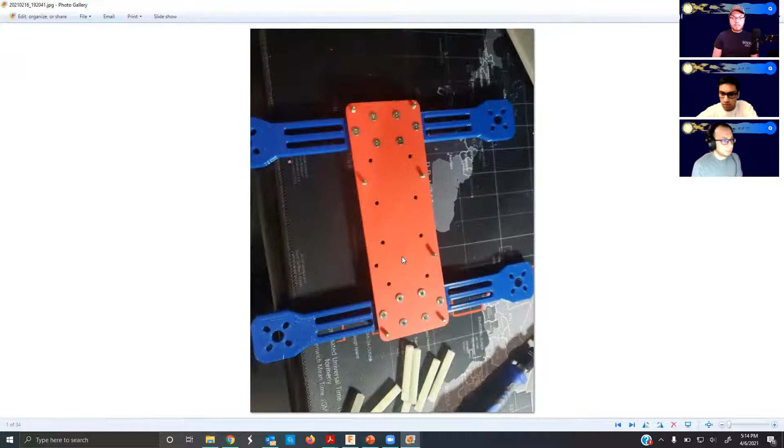Let me show some pictures of it. So this was actually 3D printed, and I think I shared this one in a previous presentation. You have the platform, then the arms, and then you attach the motors here, and of course you have the screws and nuts, the fasteners that hold everything together.

The idea behind this middle piece is to try to keep it sturdy enough so that it doesn't bend, since this is so long. And instead of making the whole thing super thick, just make the center line thick and hope that that should be good enough until we fly it and crash it, right?

And these are actually just store bought on Amazon, these spacers. So you can see these holes right here - these were actually designed with the spacing in mind.

Since I already knew I was going to use this flight controller, I went ahead and took the distance of these two holes and also put that onto this platform, so that way you could just screw it in.

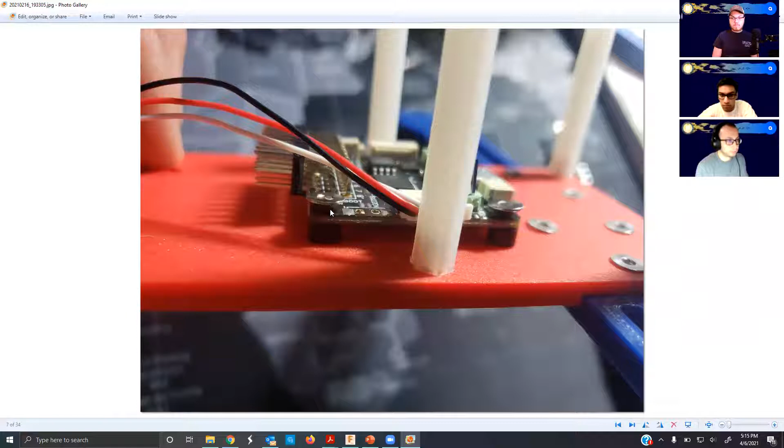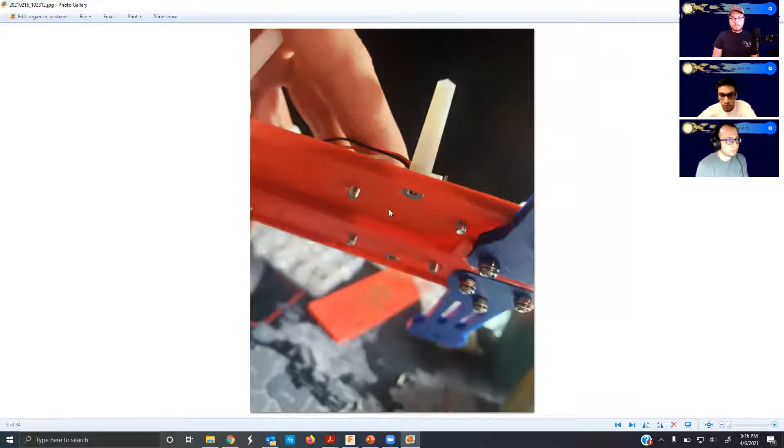So you can see it's got a couple small spacers, but the screws go right in. I guess it's kind of like you have to know which parts you're going to use in order to design it right. You can see the screws at the bottom right here that I was talking about.

And finally, once you add the nuts, the motors - the spacing on these I think is pretty common, so it should be good with just using a standard design with the hole pattern right here.

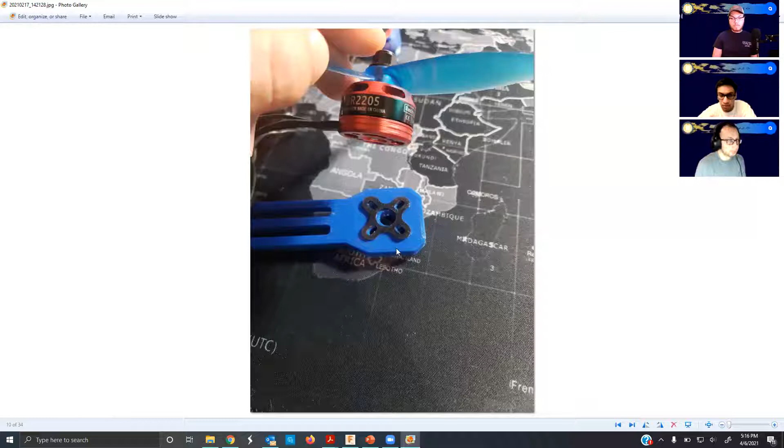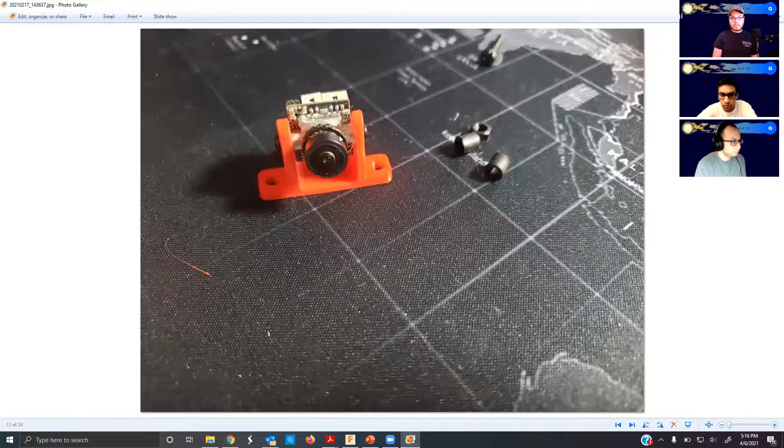And the camera, well, once again, it depends on what camera you're using. This bracket was also designed specifically for this camera. As you're gonna see, it bolts right here actually, and this is the top piece. I'll show the 3D model in a bit.

So that's how the camera looks on the top part, which is upside down. Then you have the electronic speed controller. Once again, measure the holes, and if you include that correctly in your design, then everything just bolts up pretty easily. These screws are pretty long, so they were pretty helpful.

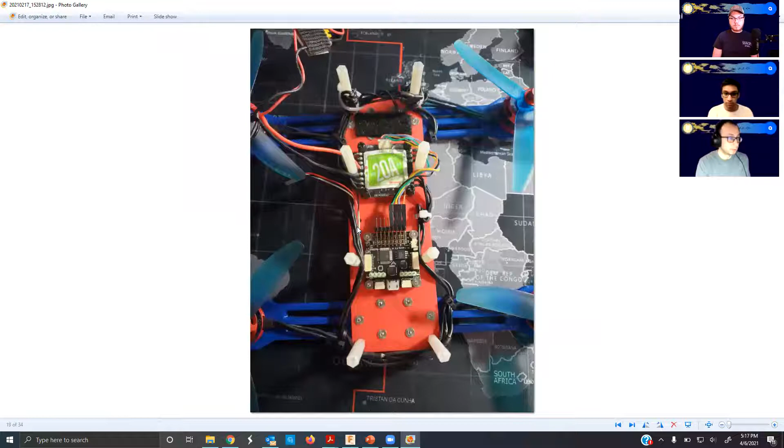And this is the bottom view of that. One of the things I used was Velcro, just because some things are so light, or they're not too critical, like they're not gonna fly off.

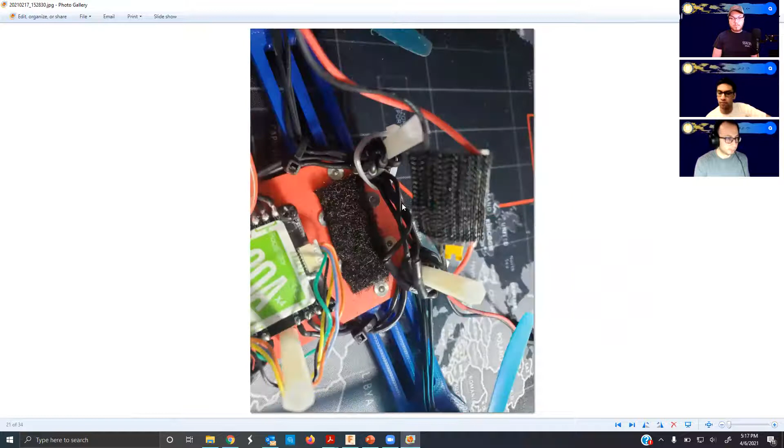Like Velcro is enough, so that's what I use here. I think I forgot what I put here - oh yeah, I think it was the battery eliminator circuit. That thing weighs just - it's really light, so the Velcro was enough to hold it in place.

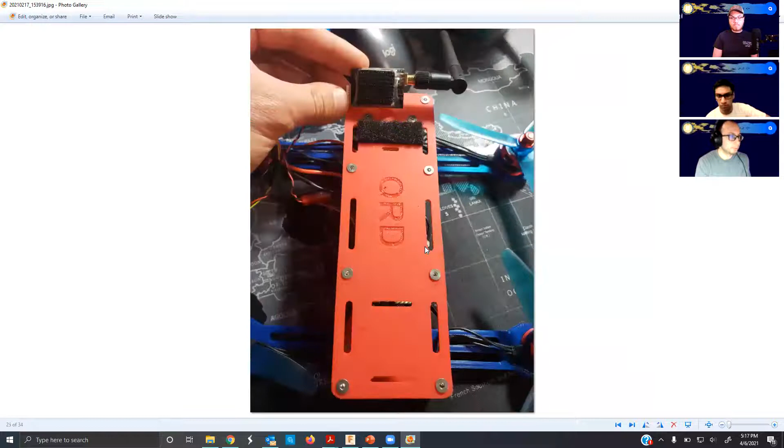And this is with the top piece on top of the drone. Once again, we have the Velcro - Velcro is our friend - and this is the video transmitter.

So you're gonna see with that one, I actually designed these holes right here, so that I could put a zip tie in addition to the Velcro, just because they kind of... pre-made, I guess we could make a custom bracket for it. But in my case, Velcro is a lot lighter than having an extra plastic piece to hold it, so I just went with the Velcro.

With drones, one of the things you're trying to reduce is weight, right? It reduces your ability to fly longer if you have a really heavy drone.

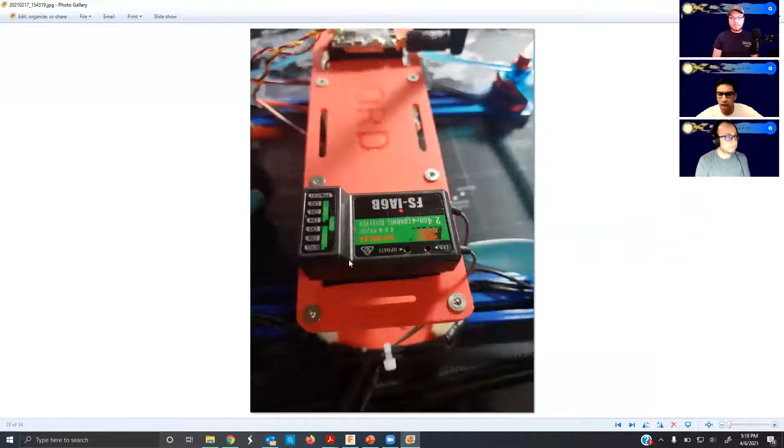I have a question. Yeah. So, at this point, I was wondering about the size of the holes for the zip ties - if they're long like that, wouldn't the zip tie go left and right? Couldn't it slip off?

Yeah, so it potentially could slip, let's say from here to here, but because it's pretty much enclosed within this gap and this gap, it's not gonna fly completely off the drone. So it might slide a bit to the left or right, but if you tighten it pretty well, even if it does slide a bit, it's not gonna fly off.

This piece, that's the important part, right? We don't want these pieces to fly off mid-flight. I would say you could even use two zip ties, one on each end of the hole, and that would probably secure it even better.

Oh yeah, so that's a very good point. Or actually building off of that idea, that was a good idea - maybe I could add an addition right here, maybe halfway or something, so that way it's two holes instead of one big one, or three small holes. True, but you also want to decrease weight, so I guess if that's good. Yeah, kind of trying to compromise.

So there's that zip tie, right? That we were just talking about.

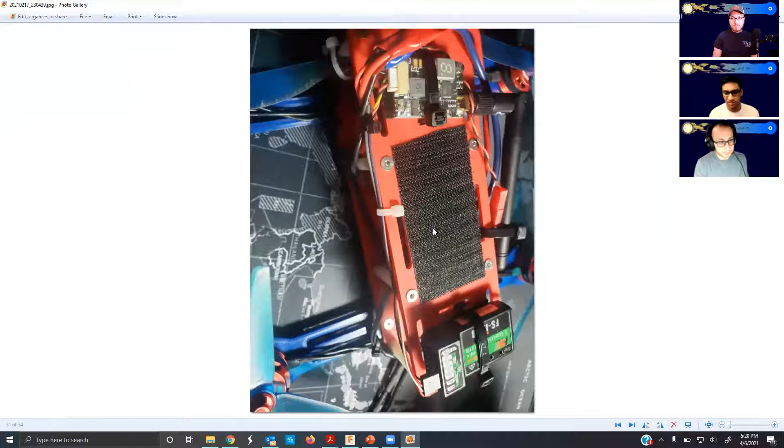And for the battery, I once again did the same with the Velcro - one piece on the drone and then the other side on the battery. The battery's pretty heavy, so you kind of have to strap it down. In addition, they have these straps that came with the battery, so that was pretty helpful. It's just safer when you add something so light as a strap - it's better to use both the Velcro and this. If you design brackets into it that could hold it, then you might not need the strap, but with this design you do.

This is the final looking product. So let's go over to Fusion.

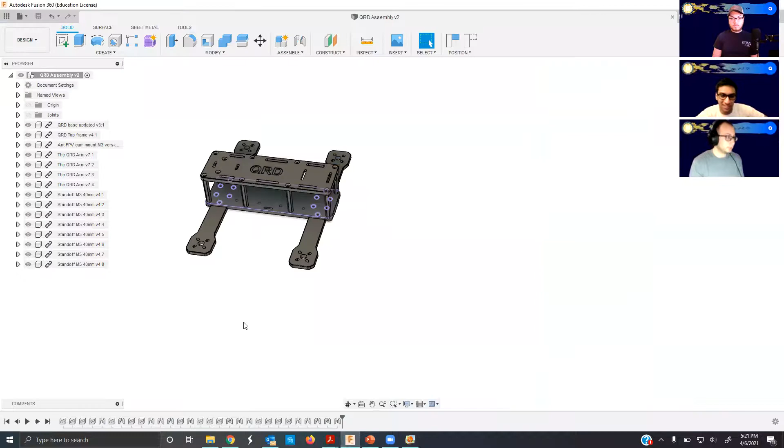So I designed these pieces individually. You can see them over here on the left. But let's take a look at the assembled model.

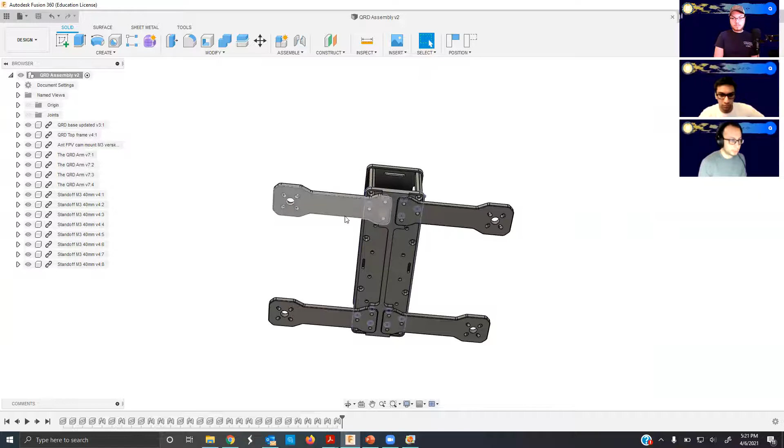These arms are pretty much the same piece - you have four of the same parts. And if you take a look at the picture, this one has these cutouts, but I ended up crashing that one enough and breaking them so often that I decided to make it completely solid.

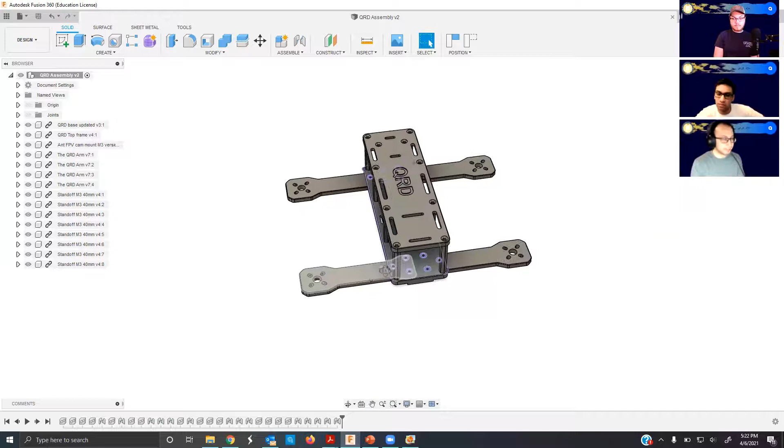This one seems to be a lot better in terms of not breaking. They actually survived a pretty hard crash, three of them at least of the four. So that's a lot better than four of them breaking.

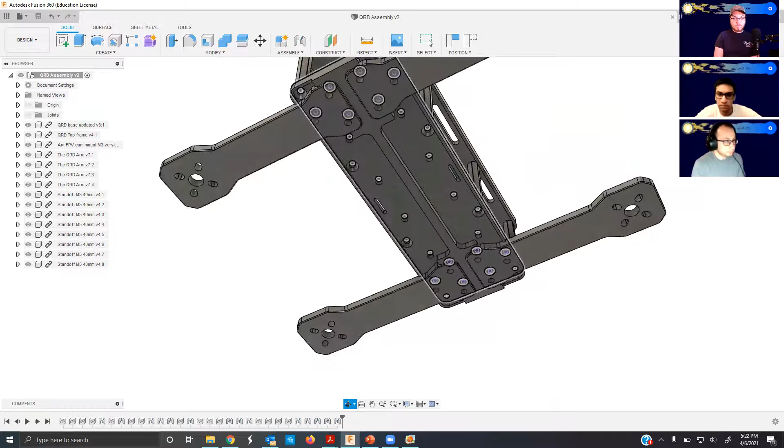So once again, we have the bottom - I call it the bottom frame - and then the top frame. And then there's that little camera piece right there.

So what I did was I inserted these individual files into this Fusion 360, and you can see right here, they're pretty much like components of an assembly.

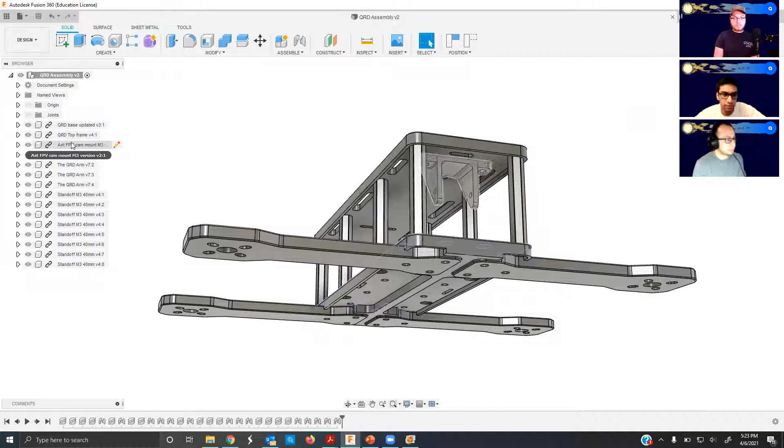How did you create the actual components - in Fusion 360 or in something else? So I use Fusion 360. Let me open a couple of these.

Oh, what happened? I guess you clicked on the top frame, QRD top frame. Okay.

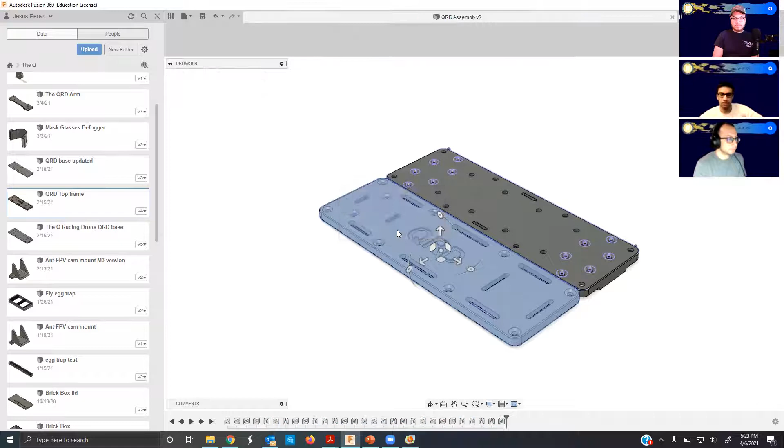So let's go with the base and just that one for now. Let's see if it works. Okay, yeah, so over here at the bottom you can see the steps - let's go at it one by one.

So I like doing things pretty simple, so first start off with the rectangle. This is like your real estate - you have to measure your parts and estimate, oh, I need 150 millimeters in order to fit all this. And so that's what I did. And if it ends up being that you need more space, you could go ahead and edit this and make it longer if needed. I made these holes.

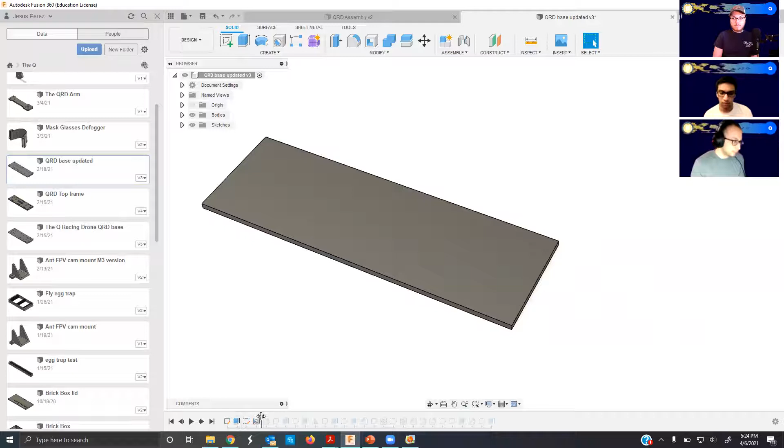These are for the standoffs, and I tried to space them evenly just to evenly distribute the crash forces, if any, or more like when you crash.

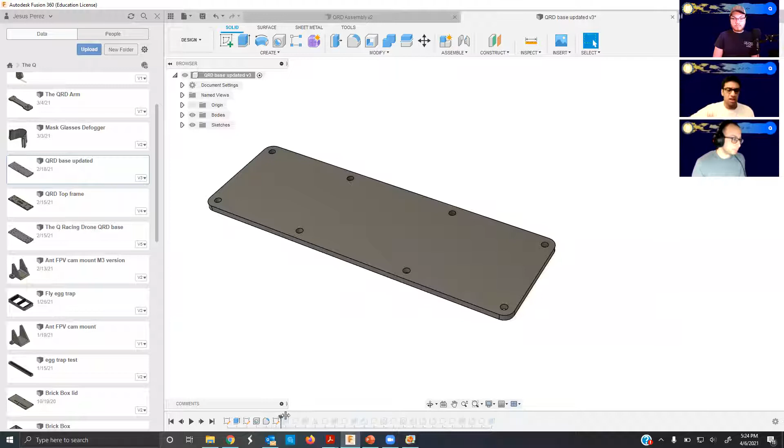Does that matter a lot? Like even at the smallest hole, would it affect the balance of the drone?

You want to have your drone probably as equally balanced as possible, but you could do some last minute adjustments, specifically with the battery. So I try not to worry too much about that until I place the battery, and I try to just balance it until it feels more or less in the center. Otherwise, if you put the battery all the way in the front, then it's going to be front heavy, and your motors are actually going to be compensating for that. So it might affect your flight.

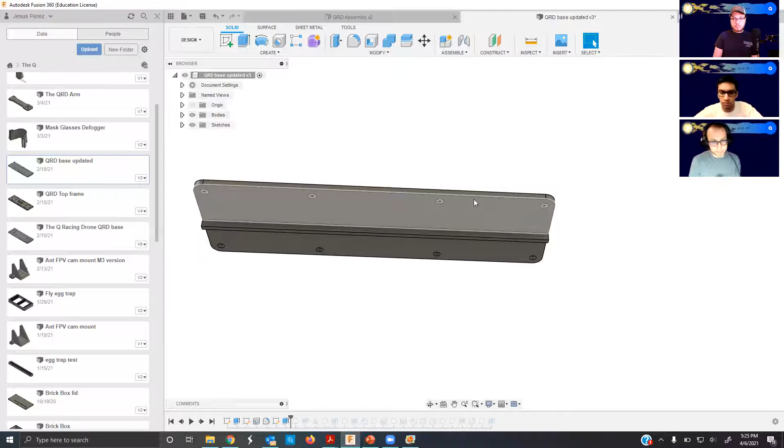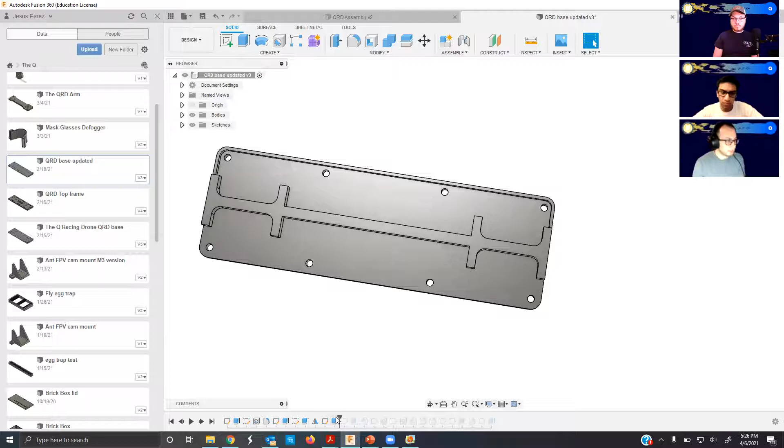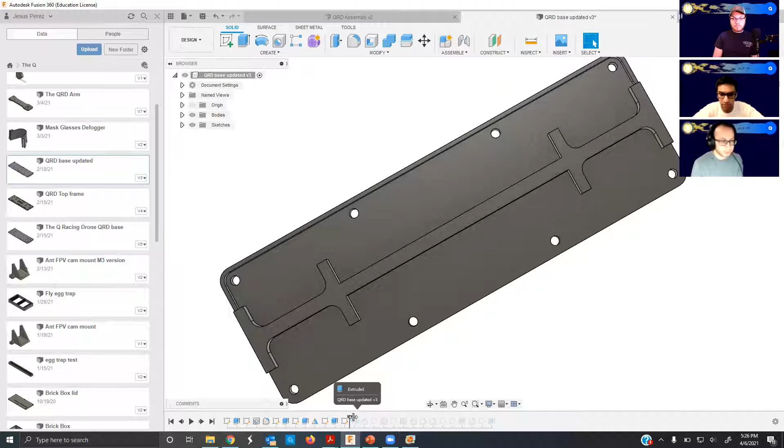So continuing on, the mirror function is pretty useful. I could just model half the thing and use the mirror to complete the side. So I added this rib right here to try to make it stronger on the outside without making the whole piece thicker. I might end up having to add a few more ribs, diagonal pieces, one over here, one like that, just because in the recent crash it actually broke pretty bad. But then again, it fell pretty hard, so that probably would have done it either way.

Are you going to tell us about your recent crash? Did you show us the video for that last time, or was that the first one? No, that was the first one. In this most recent crash, my camera was acting up, so I wasn't able to record it.

But pretty much, I let a friend fly the race drone because he's familiar with other drones. He's an experienced pilot with other types of drones, but he hadn't flown a race drone before. I talked to him about this drone, and he wanted to fly it, and I thought it'd be a good test. I made sure to emphasize to be careful, it's a lot faster, but I don't know.

Then you crashed it? Yeah, it was pretty much a takeoff, vertical, and it went up so fast that I think he panicked, because I panicked just watching it, and then it just came straight down. That was pretty much it, I don't know. Good to know, I guess. Yeah, that's the reason they have flight simulators, right? It's a stress test.

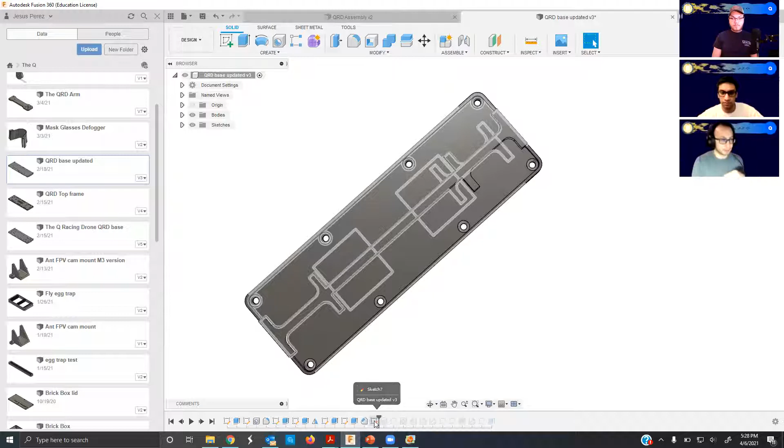So these holes right here are actually the ones for the mounting. Did I label it? Oh no, I didn't. You could edit the sketch name. So, mounting holes for the controller. That's just good practice.

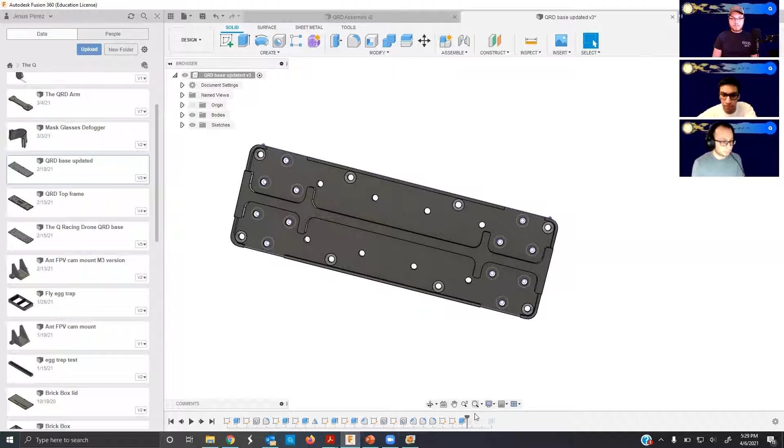And then some more holes. These were for the arms, right? Yep, because the arms stick out this way. Just kind of one step at a time. The way I tried to design this one was such that if something broke, you could access the screw right away without having to take off so many parts. Let's say an arm broke, I don't have to remove so many parts just to access the screws on that arm.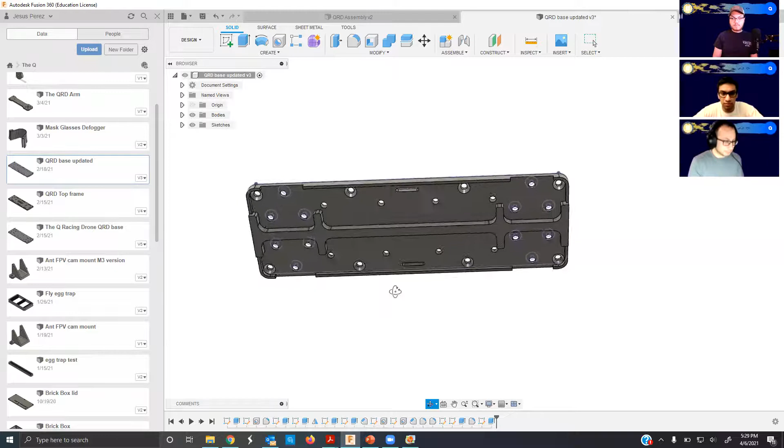This one is pretty much, if something breaks, you could easily just replace it. Yeah, I mean, it looks designed really well. We're gonna find out after we crash it enough.

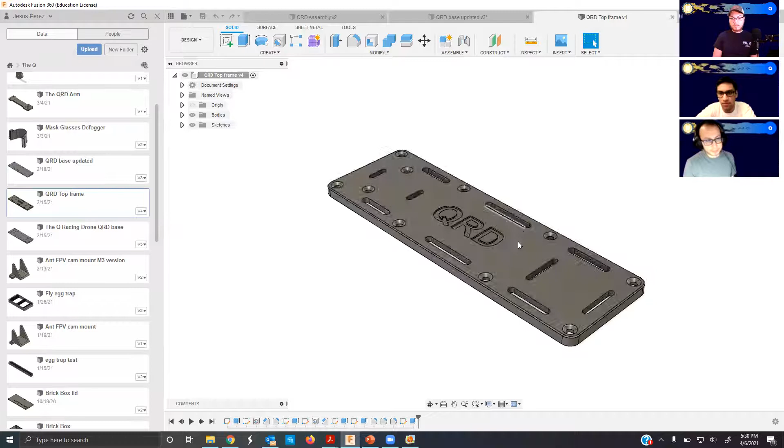So the top frame - I guess the important part between the top and the bottom frame, unless you do a unibody frame where the top and bottom are all one piece. The thing with having more pieces like this is if one piece breaks, you could replace just that part. If you have a single piece where the whole frame is one part, and you crash it, you have to replace the whole frame. So it's good to have a few separate pieces.

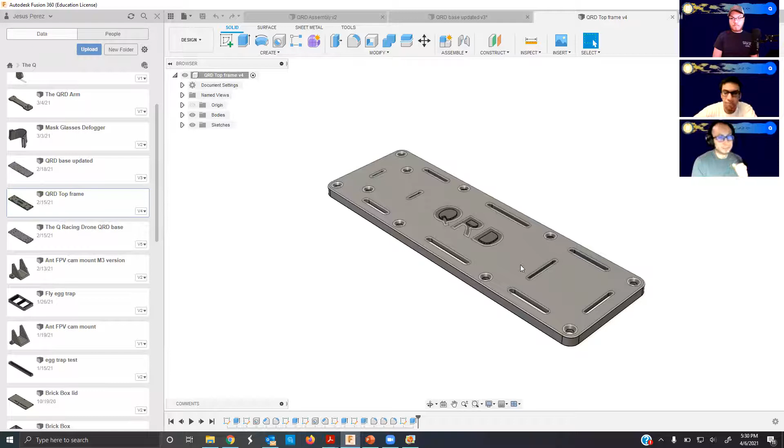I have a question. So let's say one side chipped off, are you going to chip the same piece off on the other side, or print a whole new one? For example, which part? Let's say one of the screw holes came off on the bottom right, what are you going to do in that case? Are you going to go to the diagonal opposite one and break that off too, to make it even, or print the entire thing again?

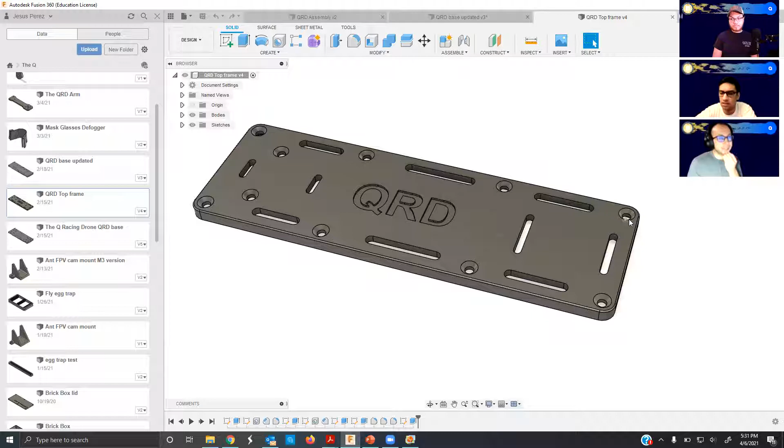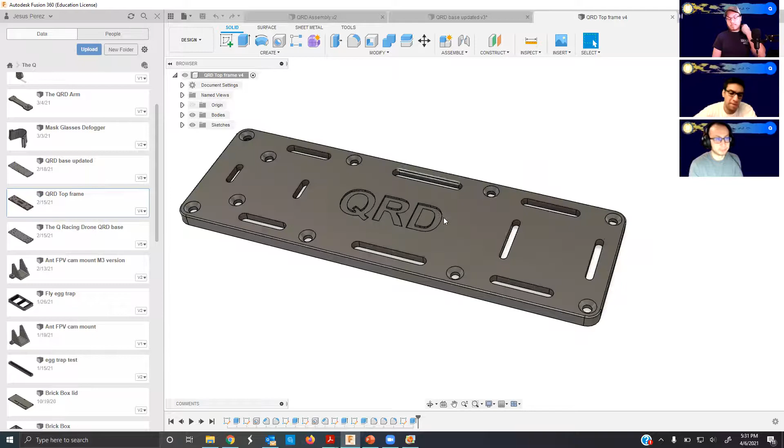If I'm out in the field flying and a piece breaks off, but it doesn't impede the functionality, I might just keep flying until something else breaks. But if I'm at the house, I'll just replace the whole piece, because it'll probably only take 10 or 20 minutes to replace it.

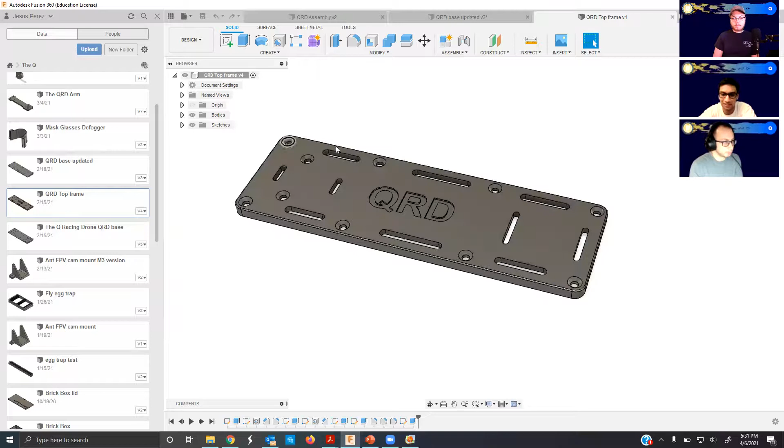But yeah, the important part with this one is you have to match these holes with the bottom holes, otherwise - I think you can see that right here. If I go to top view, these holes line up right here. If you look at it straight down, they line up pretty well.

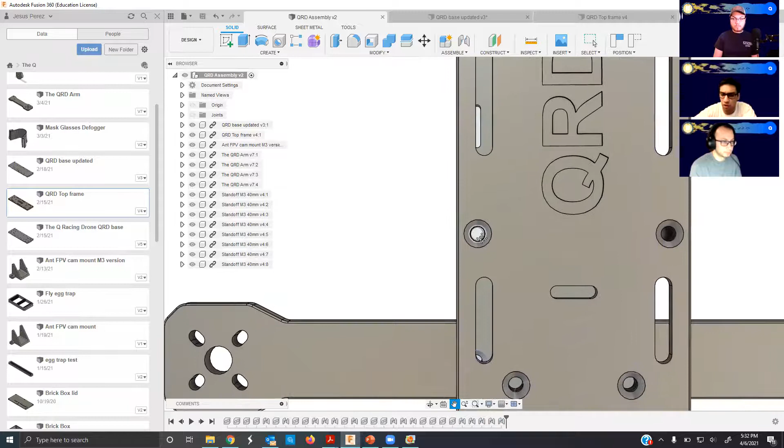How did you do that? Did you use some sort of calculations to see where the hole would be? Yeah, so you could copy the sketch, or otherwise just use measurements - for example, they're 50 millimeters apart, with a 5 millimeter inset. I think I used the offset, so this is 5 millimeters away from this one, and this is 5 millimeters away from that. So yeah, you could just use math to do it that way.

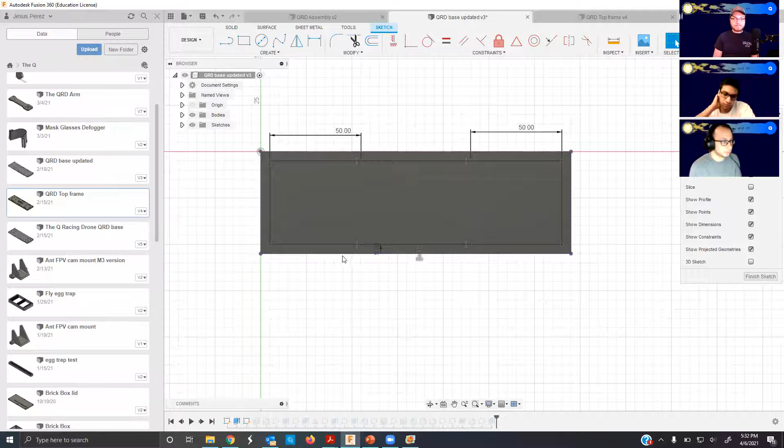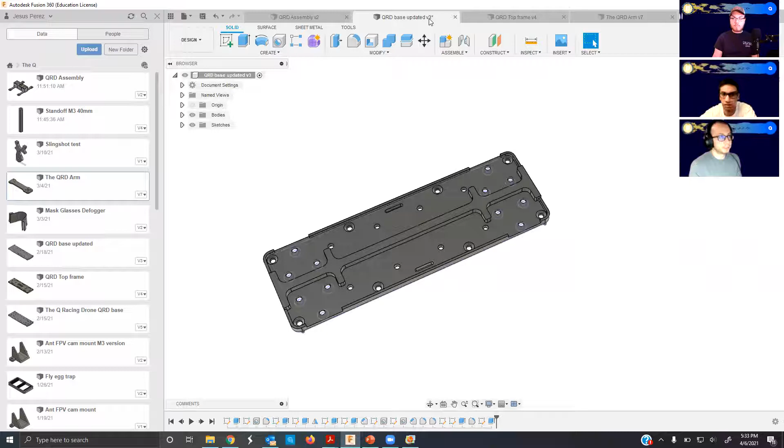But yeah, I think that was pretty much it. Let me see if I show the arm real quick. Oh yeah, at the top you can see the version number. You can see it took me, this is version 3, this is version 4. So it might take a few iterations to get it right.

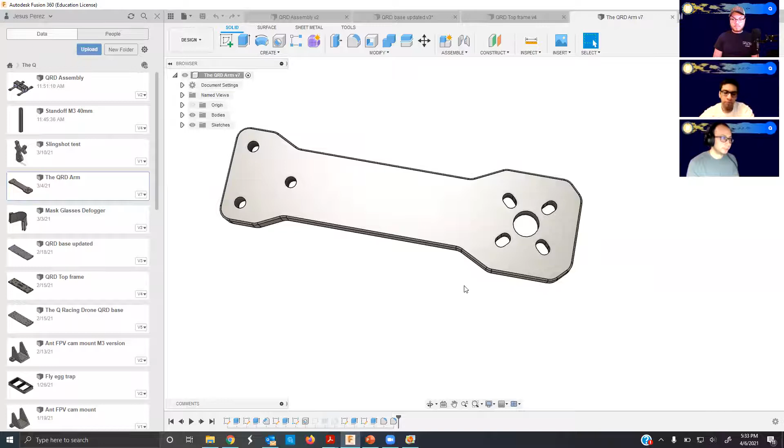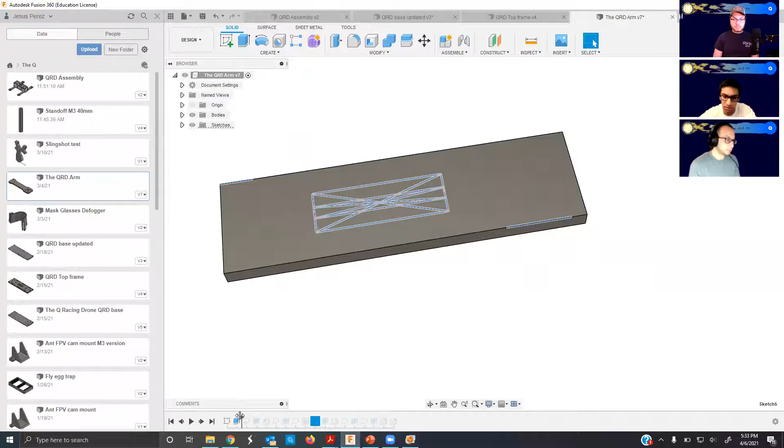Simply overlooking a small number, you enter a different number, and things don't match up, so you've got to change it and reprint it. I think here, so these were the lines I showed earlier that I ended up taking off, these cutouts. But once again, yeah, just kind of start. I like starting with the basic shape and just cutting from there.

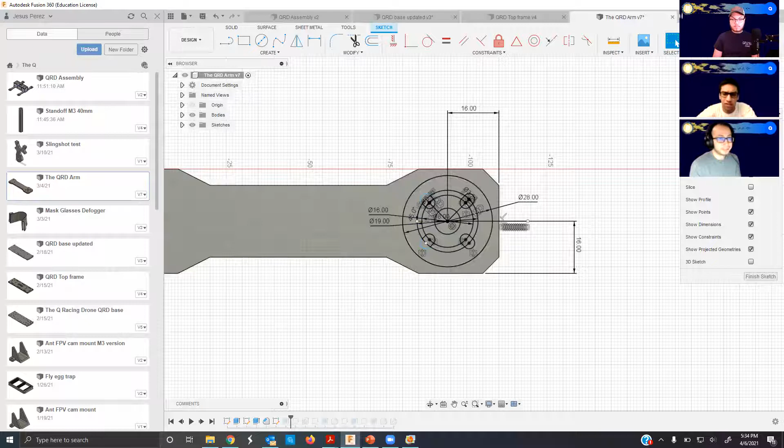Sometimes it can get kind of nasty, looking at so many numbers on one screen. What's the extrude step? Extrude adds, so you start off with a sketch, and then you extrude the cuts. So you extrude the sketch, you're either adding or removing material, like a third dimension.

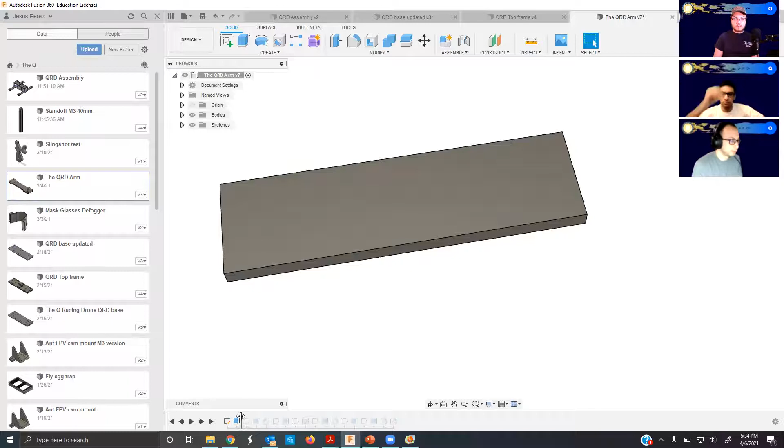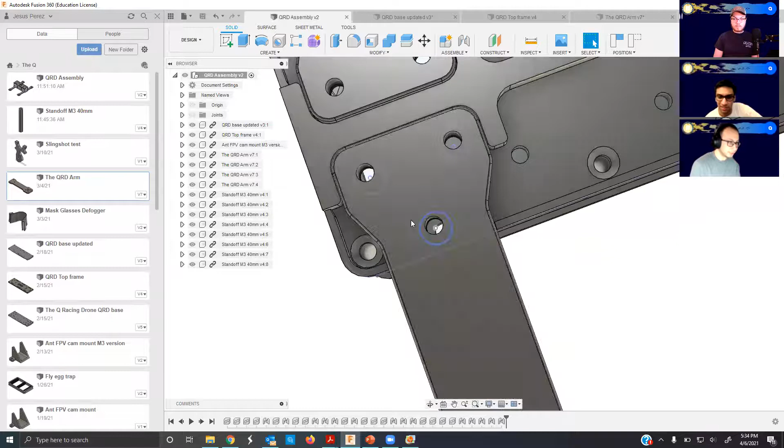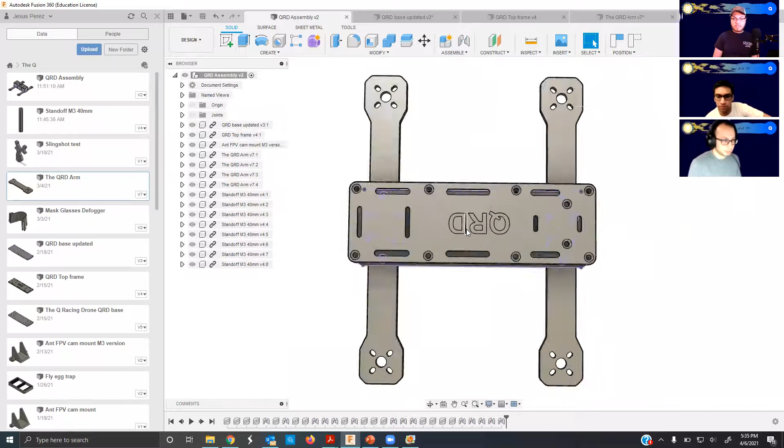And once again, yeah, like Armand was saying, these holes were calculated to be at the precise spot so that when you place them over here, they line up with this bottom frame. It kind of looks funky, like they don't line up, but they do. I think it's just the way this thing shows it. There we go, it seems like you have to look at it straight up and down for it to line up perfectly.

This is my first time using Fusion 360 for an assembly, so it's pretty new to me, actually. So how did you get all the parts on the final drone there to piece together perfectly?

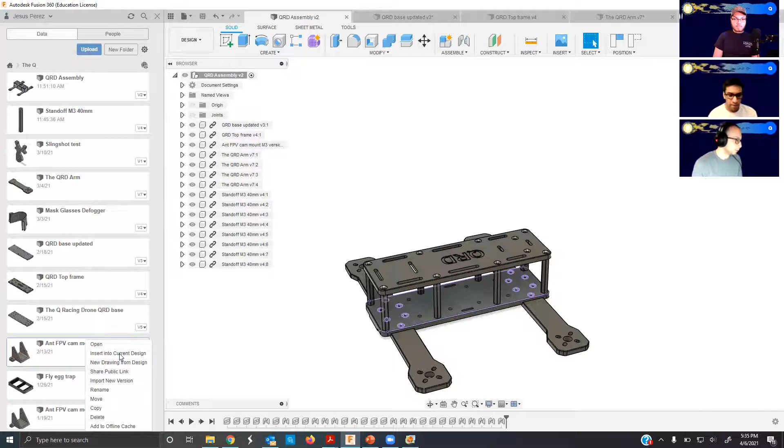So I import individual parts. For example, let me click on a random piece. I click on insert into current design, and it'll pop it up right there. And then I could go ahead and move it or rotate it if needed, but I'm just going to leave it there for now and press OK.

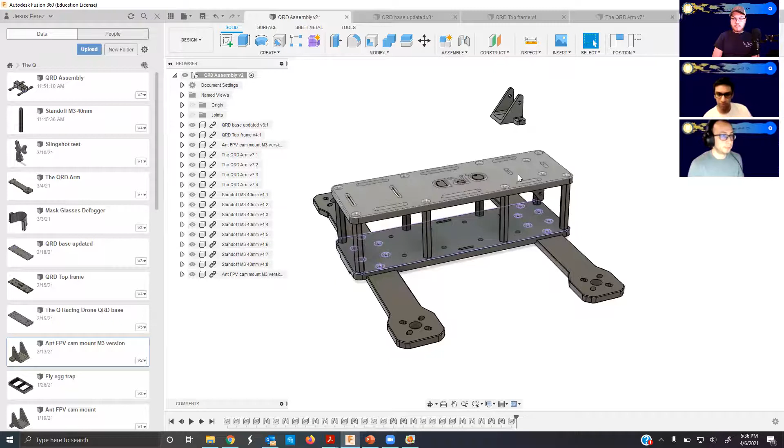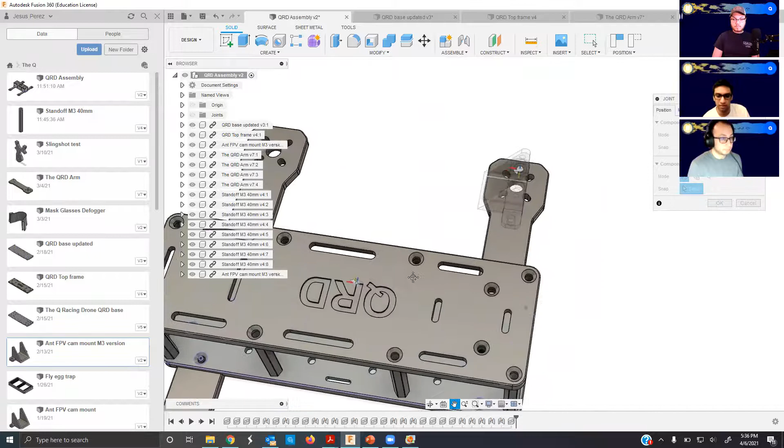From here I could move it as needed. Do you see how it moves as one piece? Yeah, I could attach this to there using this joint function. So I could say I want to attach the bottom of this hole to, let's pick a hole over here. Let's see if it allows us to do this one, it might give us an error. Oh, I think it might not look pretty, but it allowed us to do it. So now it's joined together, right?

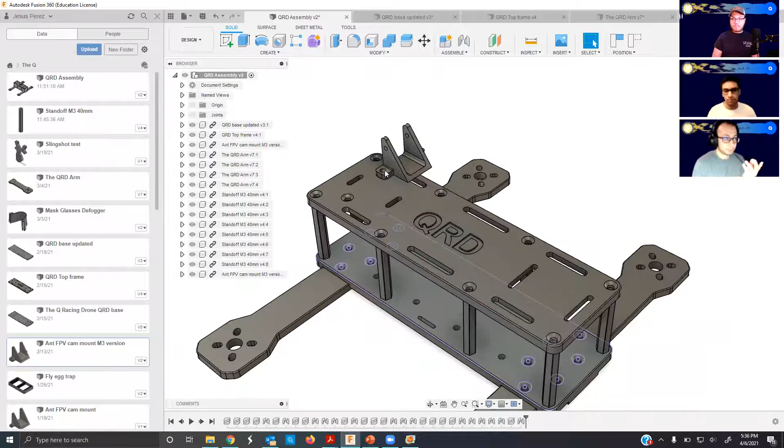That's pretty neat, so you connect on the screw holes that you make. It knows where the screw holes are and how to connect them. Yeah, so I'd use the screw hole in this case, but you could probably use other features. Let's say I wanted to join this edge with this bottom edge, it would probably allow me to do that. So like corners, faces, you could probably use those features also.

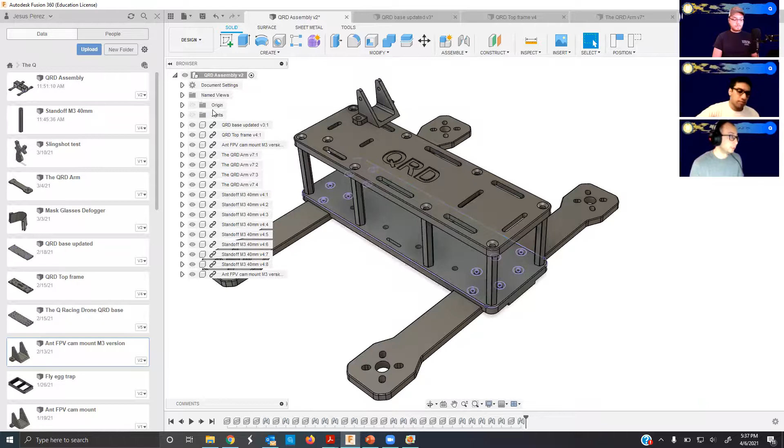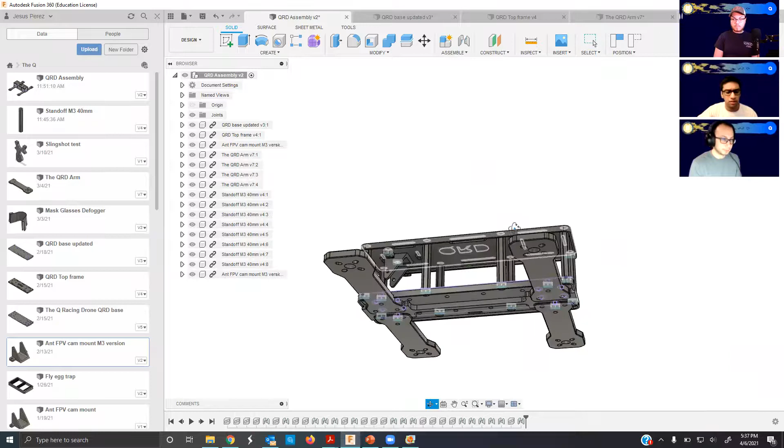So actually, if I press view joints, these are all the joints I made to make it together, to make it one piece, or like an assembly. This assembly is just for you, right? Because we're not actually 3D printing this, you're 3D printing the individual parts, right? Yeah, so this is just to kind of visualize it in one assembly.

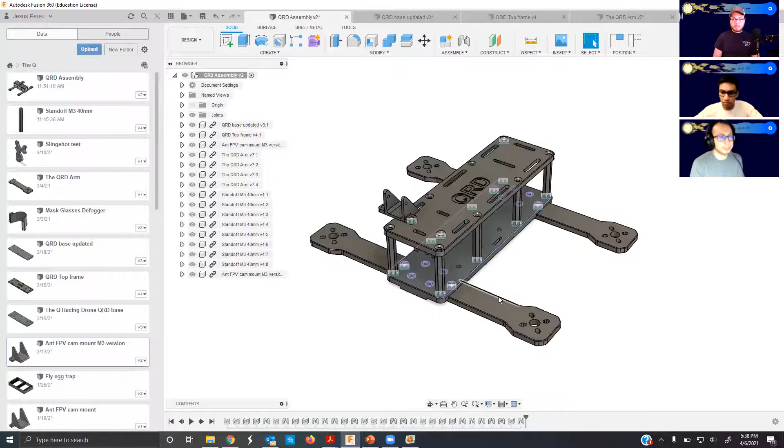I like this view, it kind of gives you a visual of what it's going to look like. In some places, not for these motors, but in some places you could find the 3D model of the motor or whatever component. So in some cases you could actually model out to the screws and nuts, to that detail, if possible, if you can find the parts. But in this case, it's just a basic frame only.